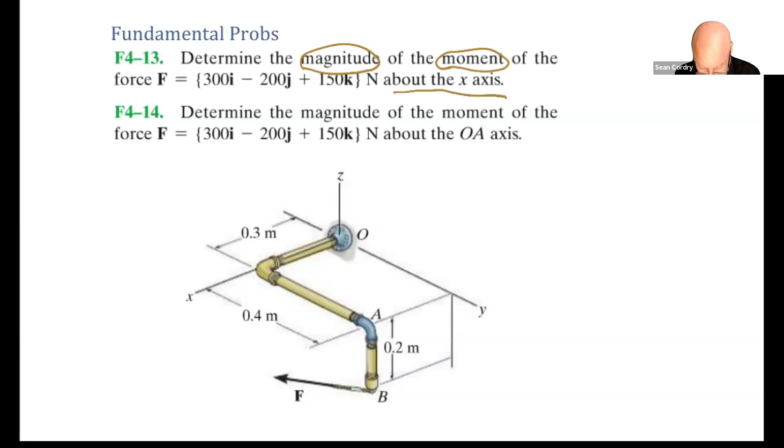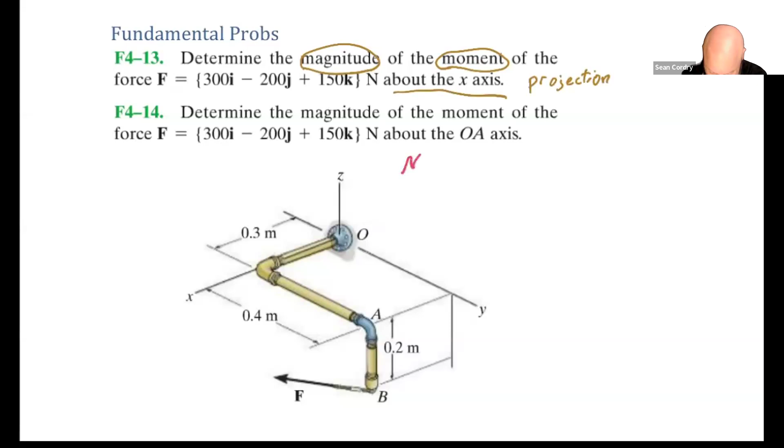Okay, so this is kind of like a projection. So what we're going to end up doing is we're going to end up finding the moment, and then we're going to project that onto the x-axis. All right, so that's the plan. Now, what that's going to give us is it's going to tell us something about how much our little force down there is trying to twist the pipe structure with regard to the x-axis.

Okay. So if you take a look at O there, and I hope this shows up good in your picture, but it's like a pipe fitting. It's like the pipe is screwed into the wall. Okay. So here's what I want you to do. I want you to talk this over with your neighbor. The force right there where it is, is that going to cause those threads at O to stay tight? Or over time, is it going the other way where it's going to kind of loosen them? Okay. So talk that over with your neighbor. Let's kind of share some ideas. All right.

Wait, can you say that again about the threads? Yeah. So the pipe is like, there's a mount on the wall there where the pipe is threaded into that mount. Oh, so you're just wanting us to figure out if it's going to tighten up as that force is applied or it's going to loosen? Correct. Yeah, exactly. Okay.

All right. Well, let's see here. Who's got an idea? Yeah, I think it's going to tighten up. You think it's going to tighten it up? Okay. So can we do like a little poll or something? Can you do reactions and give me a thumbs up? Okay, we'll do it for realsies. Okay, everybody thinks it's going to tighten up. So we're going to chase the math on it and find out if that's really the case or not.

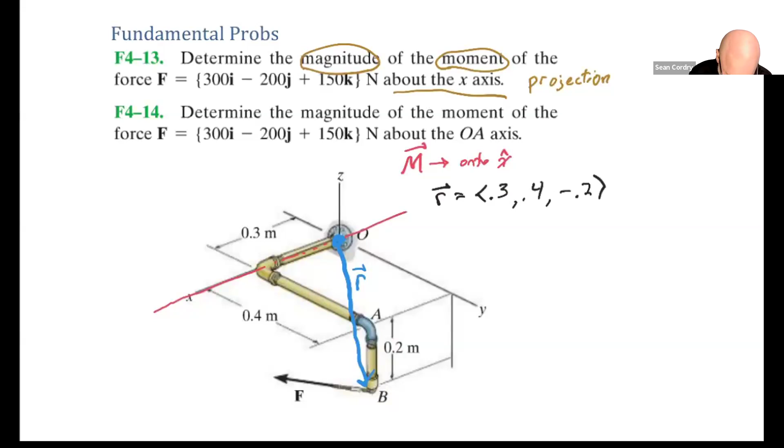So to get our moment, what we're going to need to do then is go R, cross it with F. So I'll let you work that out with your neighbor. Got it. Did you guys get it? Now I didn't say you could use Octave, but we got it pulled up, right? So we might as well. Lucas has put in there 20, negative 105, negative 180. Good. Lucas, did you use Octave or did you crank that baby out by hand? I actually used the program on my calculator I built. Sweet. Awesome. Very nice.

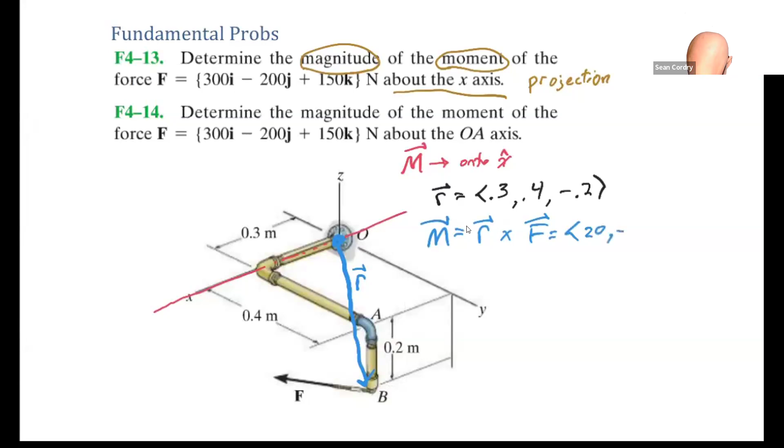Now, Mary asked a really good question. Why do we cross and not dot? Well, by definition, the moment is a cross product. The moment is a cross product. So that's why we want to do that. Now, what we did before was we used the scalar definition, which is to say that M is rF sine theta. And that's when we had to mess around with clockwise, counterclockwise, positive, negative. We don't need to mess around with that stuff here. We just put it in our cross product, pop that baby right out.

Now that's just the moment though, right? That's just the moment. But we need the moment about the x axis. So if I think about that moment that we've got right here, there is an x component, a y component, and a z component. And it's not very much x. It's mostly negative y and negative z. So I'm not even going to try to draw it on there, because it's just gonna get messy and I don't think it'll help, to be real honest.

Okay. Oh, Gerardo saying loosen. Okay. Anybody else like that? Loosen? Want to switch? Oh, Gerardo, they're leaving you hanging, man.

Can you tell me why did you decide to change and go with loosen? Because I saw that it's a positive moment, which makes it counterclockwise movement, which would be loosen. Very good. That's correct. That's correct.

All right. So if you do this thing with your hand, right? Okay. So if I have a rotation like this, then my thumb is going to be the vector that describes that direction. Okay, like this. And in our case, we know it's along X. So that means since I know this direction, I know this is going to be the rotational effort. So this is my moment right here. And that's going to try to loosen this thing. Okay.

Now, what's deceptive here, and the reason our instinct right out of the gate said that it would tighten, is just because of looking at the drawing. Now, if you look at the drawing, though, the things that matter for the X direction are this component and this component. So in terms of rotating around X, that Y component has a very small moment arm. It's a very small moment arm that's going to try and make that thing rotate around X. So we're not going to get much moment out of that thing.

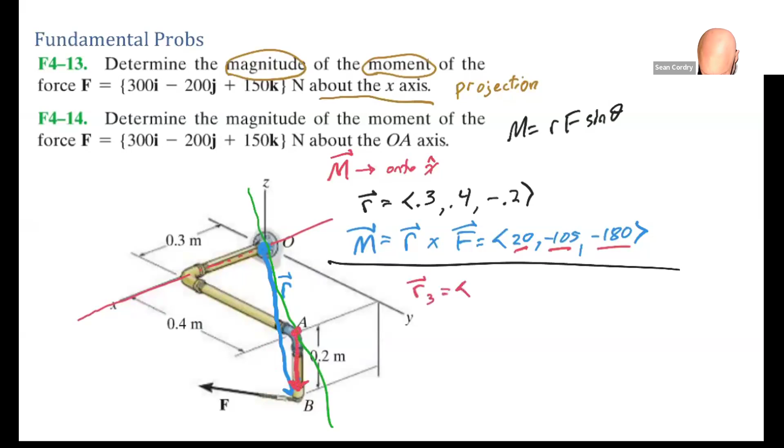Now let me clear out some of this stuff because my drawing has gotten pretty messy. Okay. So what we learn is I just need to go from the axis of interest down. So why not start at A because that's on the axis, right? And let's just come down like this to my point of application. So I'm going to call that R3. It's not going anywhere in X or Y. It's just going straight down.

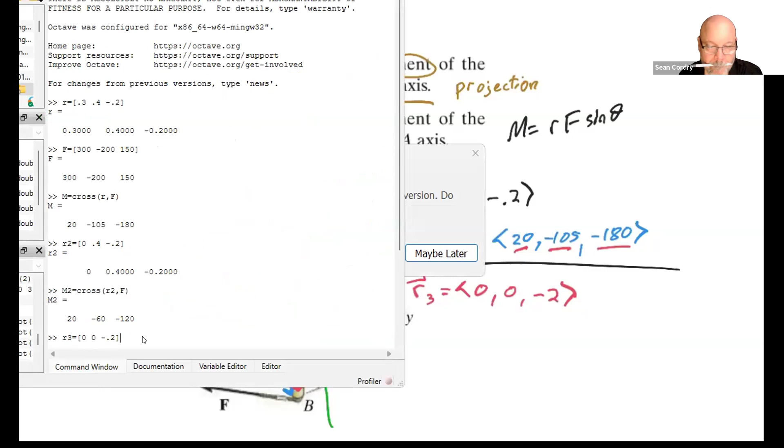Okay. Now I'm going to do the same thing. I got the same force. So I'm going to pull back up to my Octave here. I'm going to put a new R value in here. So I'm going to have R3, and that's going to be 0, 0, minus 0.2. Okay, there we go. And I need the moment, so I call it M3. Same force.

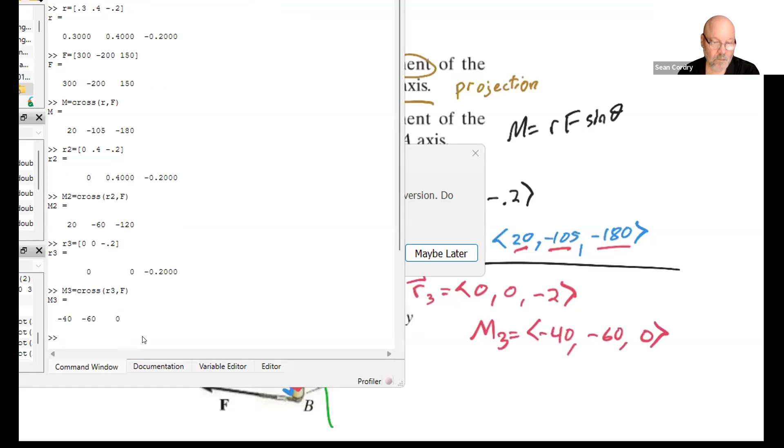R3. Oh. Boom. There we go. Okay, so what we find then is our moment. Let me call it M3. Over here becomes minus 40, minus 60, 0. Okay. Now, thing is, we want it about the OA axis. So kind of like before. Previously, all we had to do is go, oh, there it is. Woohoo.

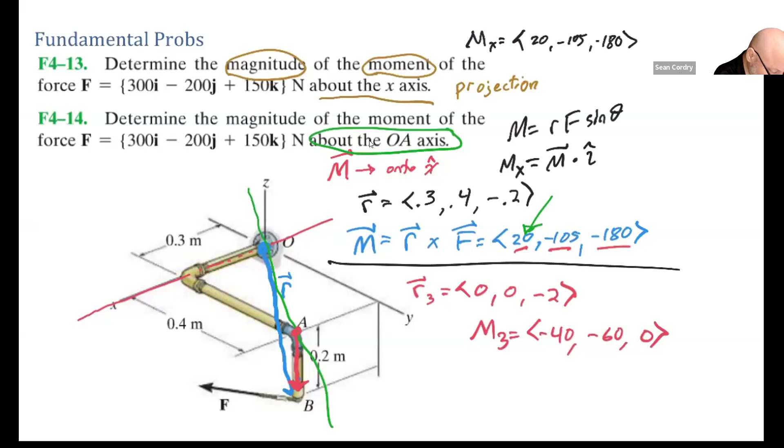But what we could have done is we could have used the dot product to find that component. So we could have gone Mx is M vector dotted with I unit vector. So what that looks like then, sorry, it's getting a little messy here. I'm going to do it up here. I've got my 20, minus 105, minus 180. And I'm going to dot that with 1, 0, 0. And hopefully you can see what's going to happen is I'm going to multiply 1 by 20, which is going to get me back a 20. That's a 0, that's not going to do anything. And that's a 0, so that's not going to do anything. So I'm just left with the 20.

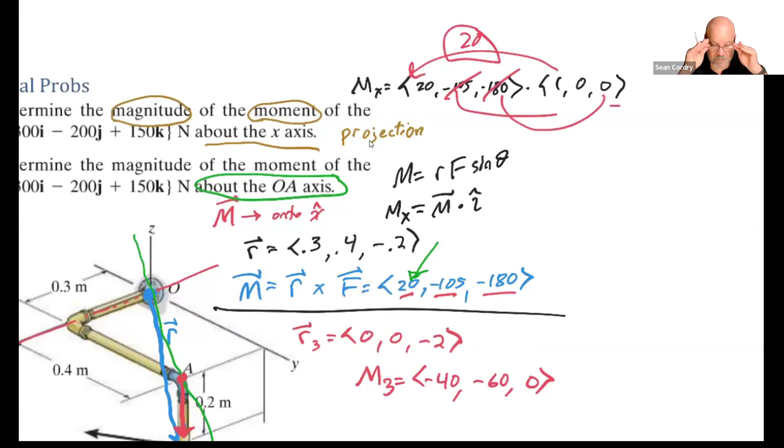Okay. So what we want to have is M about OA. So I'm going to call it M3OA. And so what we're going to do then is we're going to take M3 and we need to dot it with a unit vector along OA. And it's going to do the same thing for us. It's just going to pull that out. And that's going to tell us how much of our moment is actually along OA.

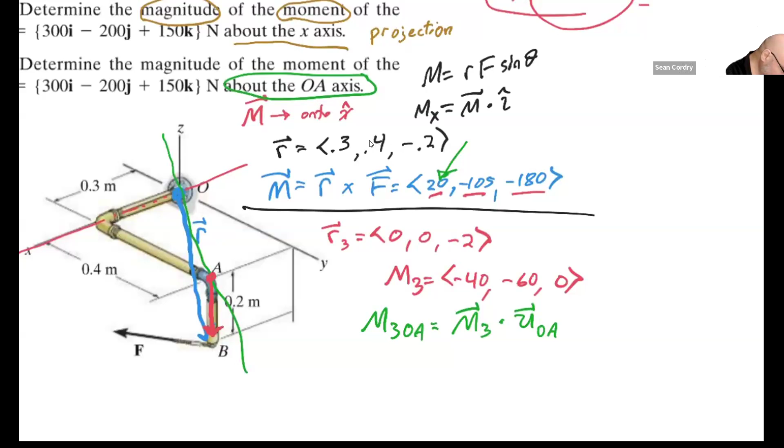All right. So with your neighbor, I want you to figure out what's OA and what's the unit vector in the direction of OA. So two things for you. Find OA and then find the unit vector that corresponds to that. Okay. Did you get it? Once you've got it, go ahead and do the dot product.

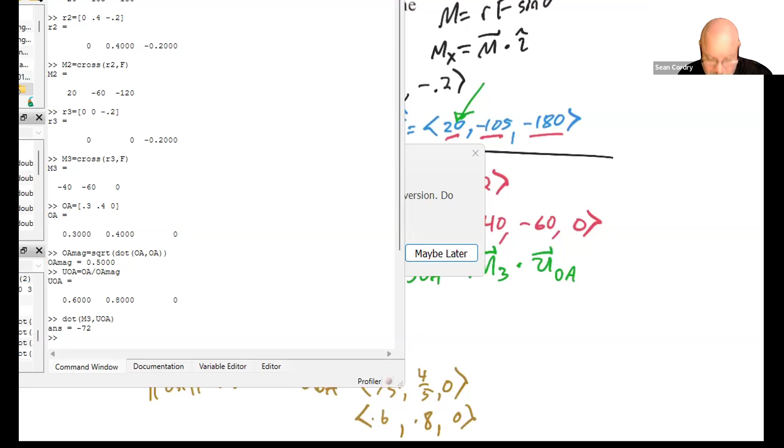Okay, so in the chat, give me some digits. How are you doing? 1 to 5. All right, that's pretty good. We're gonna do some more of these, and I think it's gonna bring it home for you because they're not really any different. Once you got your head around this, it's kind of like, same song, second verse.

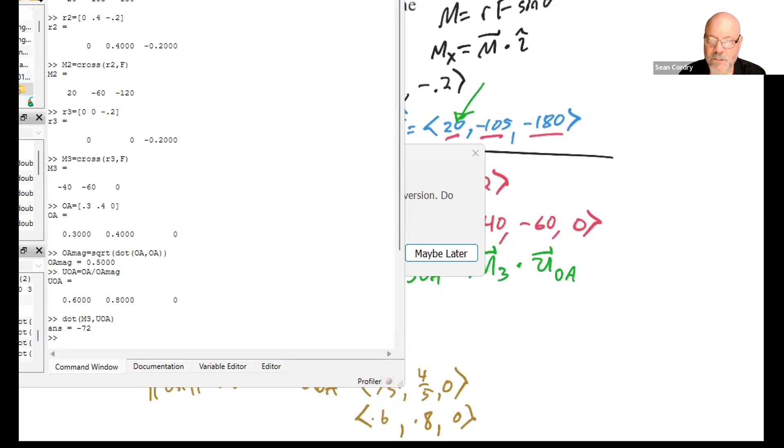Keeping up with the Octave stuff is a little hard. Yeah, I know. Especially since you can't see it very well. But here's what we're gonna do though, Gerardo. So everybody go ahead and go to your Octave. And we're going to come over here to this tab called Editor. And I've zoomed mine in, hopefully to make it a little easier for you to see.

So you're going to have a bunch of these problems to do. You know that in your heart, right? And you're thrilled, I'm sure. So how can we use Octave to make our life a little bit easier? Well, we can write a script to do these calculations, something that we can modify really easily. So the first thing we're going to do is a save as. Save as right here.

And then we got to find a place to put it. So on your computer, you figure out where you're going to keep track of that. You can see here I've got lots of embedded folders. I got to go all the way down. And we need to give it a name so that later on when we look at it, we're going to know what it is. So let's call this moment_about_axis_1, because we might need multiple copies.

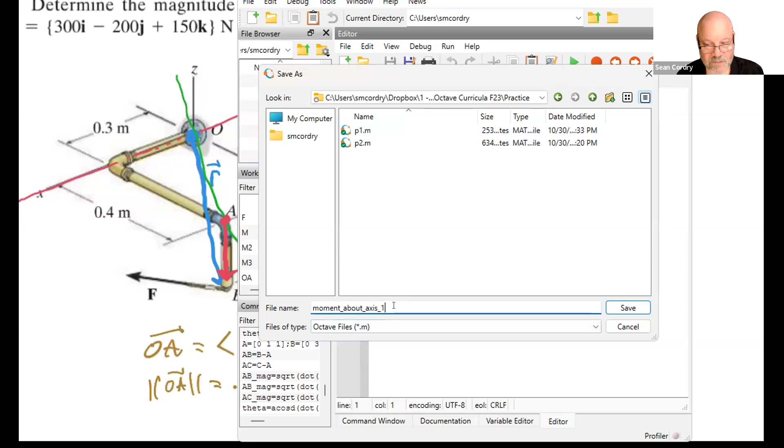Now, Octave is a little old school, so it doesn't like to have spaces in the names of the programs. That's why we got to do the underscore stuff. Then I'm going to hit save. You hit the save as button and made a file name for it, correct? I did. Yeah. And then you're going to have to figure out where you want to put it on your computer, Lucas.

All right. Now, this is going to be really simple, but it's a good time to get into the habit of doing some things. The first habit we want to develop is reminding our future selves of what we've done. Because you're going to have some project, you work on it, you come back a week later and you're going to be like, what was I doing? So learn to be kind to your future self.

So we're going to say here that this is a program or script, it doesn't matter, to determine the magnitude of a moment. I'm running out of space there on mine. You can do all this on one line on yours if you want to. I'm just going to hit enter. Of a moment about a specified axis.

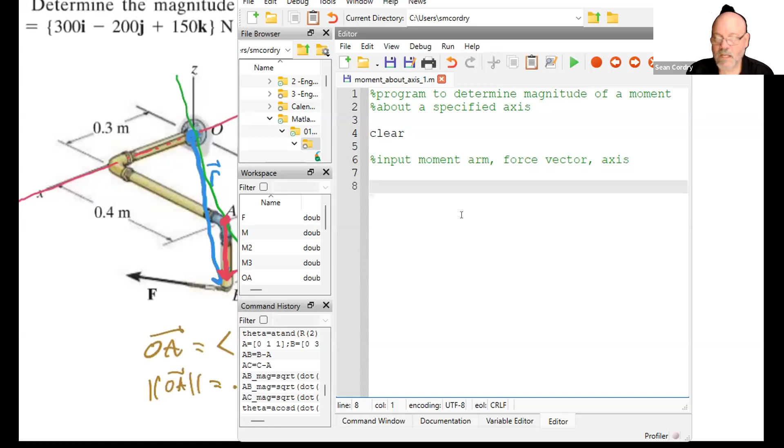So what we're going to do next is we're going to say input the moment arm, force vector, and the axis. So let's go back to the very first one we did. The moment arm is 0.3, 0.4, minus 0.2.

How are you getting your stuff to be green? Is yours not green? No. Did you put the little percent thing there? No, I put something else. Ah, there you go. So this is the editor, okay? And when you put the percent, it's just a comment. It doesn't mean anything for the program. It's just for us. And this editor is designed so that when you put a comment in, it turns green, so it's easier to see what it is.

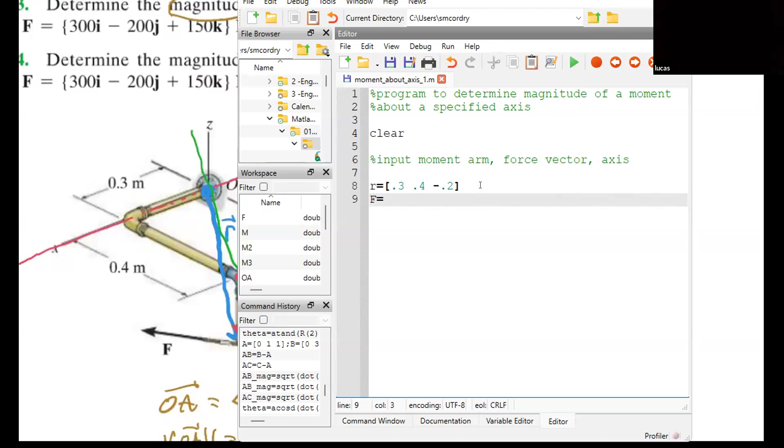So there's R. And now we need the force vector, so F, and that is 300, minus 200, 150. Whoops. You see how mine turned red like that? It's because I forgot to put the first bracket on there. There we go. And then it was the x-axis. So I'm going to say AX is the axis of interest. And we're going to go 1, 0, 0. Like that.

Now we haven't done anything yet except put in some information. But I'm going to go ahead and save it. So click save. And then I'm going to hit this green triangle over here, and that's going to run my program. So I'm going to hit it. And it gives me a message here. You probably got one like that too. And I'm just going to say add directory to load path. Boom. Just like that.

Now, it doesn't look like anything happened because things only happen back here in the command window. So starting from here, you can see it says moment about axis 1. So this is the name of our program. This is the first vector we put in. Here's the force vector, and here's our axis. So it's going to put those things in there.

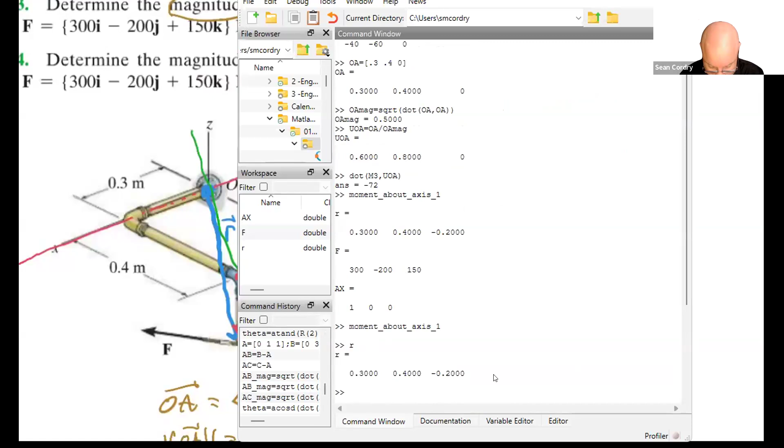So once I've done that and I run it again, I come back to my command window and it looks completely blank. So this is my second time running it, moment about axis 1, and it didn't output anything. And we might feel like, oh no, but watch this. If I go R, there it is. F, there it is. So it's in there. It's just not showing it to us.

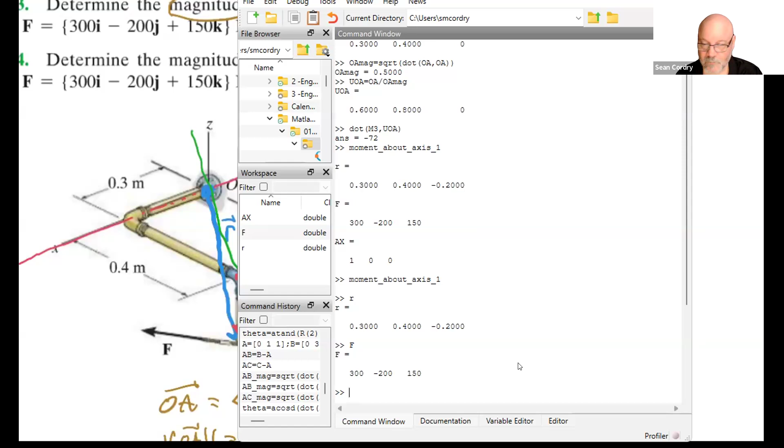So let's come back to the editor. We've got all that done. Yay. So let's find our moment. Our moment is going to be the cross product of R and F.

And then what I'm going to do is, first time out, I'm going to let it show it to us. But I'm going to hit tab. I'm going to go percent, calculate the moment. So I used the percent. I just put a comment on there. So this isn't going to do anything. It's just a note to me. I'm going to run it again. Come back to the command window. And there's M, just like we had before.

Okay. So come back over here. Now, again, we don't really need to see that. So I'm going to put a semicolon on there, and that's going to take care of that. So it won't show us now. But now we need to find the amount of that. I don't know, maybe it's useful to see. I'm going to renege on that. Now we need to find the amount of that in the direction of the axis of interest.

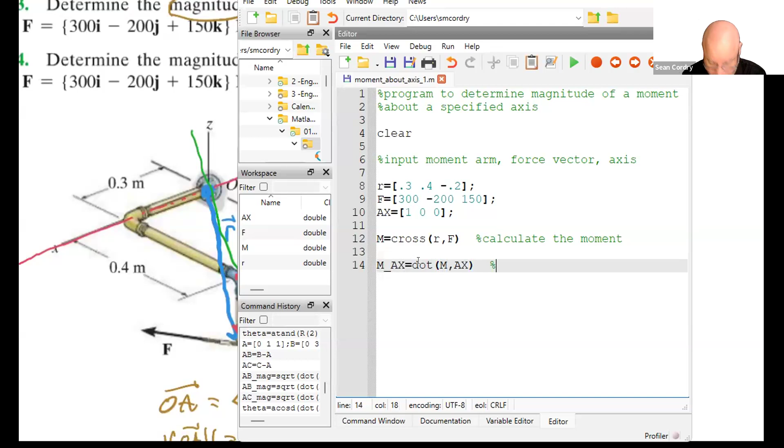So we're going to call it M underscore AX. So you can put an underscore in a variable name. It's no problem. And all we're going to do now is take the dot product of M and AX. I'm going to hit tab, make myself another note. Accumulate. This is like a projection.

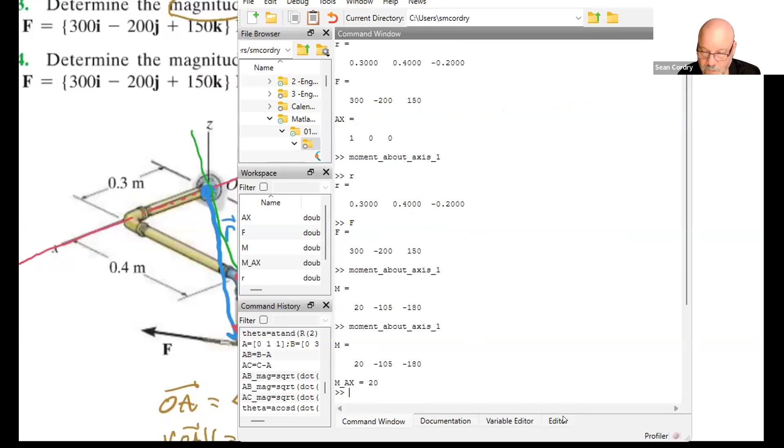Okay. I'm going to save it. Haven't done that in a little bit. Hit my triangle. Come back to the command window. Ah, there we go. Boink, boink. Picked out the 20. Piece of cake. All right. Let me pause here and make sure everybody's feeling pretty good about what we got so far.

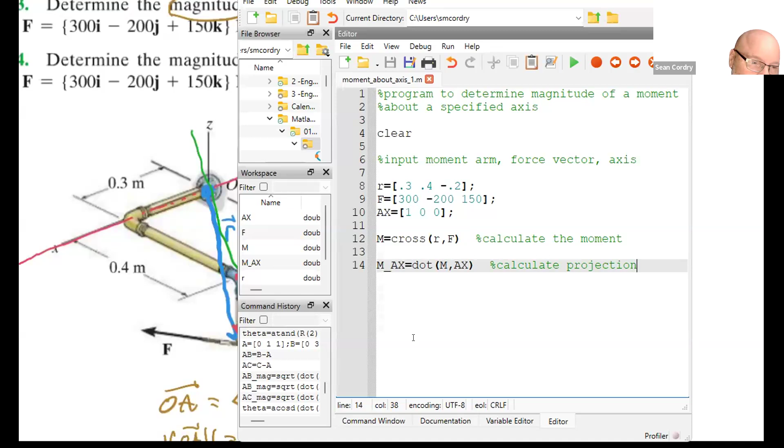So, oh, Mary's got an error. Parse error near line 6. Add directory to load path. What? Nothing. Never mind. Did you get it fixed, Mary? I forgot the equal sign. Oops. That would do it.

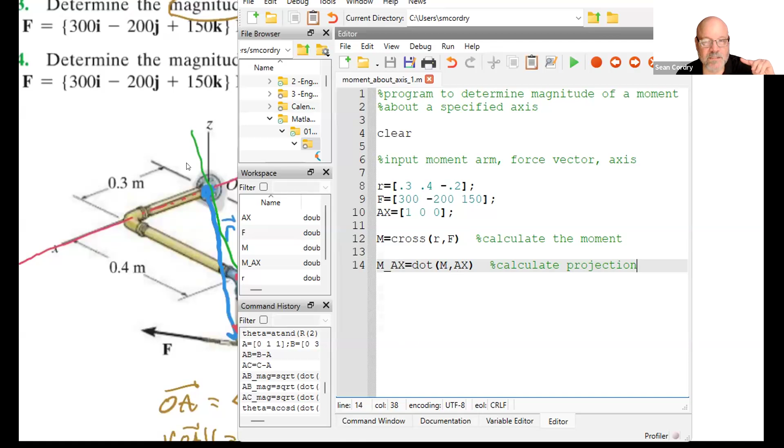Okay. So now what we're going to do is, if you remember, when we went to the second one here, we were about the OA axis, not just the X axis. And we had to go through this stuff down here where we defined the axis, then we had to turn it into a unit vector, right? So we really need to do that. Where did my thing go? There it is. So we're going to come up here and I'm going to say UAX. Now, right now, UAX doesn't exist. It's going to be the unit vector for AX.

But before we do that, we already got 1, 2, 3, 4, 5 variables. So let's leave some breadcrumbs for ourselves. So R is the moment arm. F is the force vector. And I'm going to make it look a little nicer. And AX is the axis of interest, like so.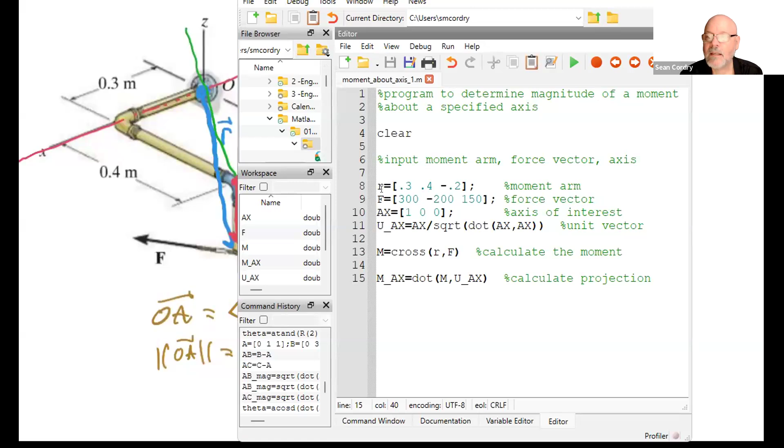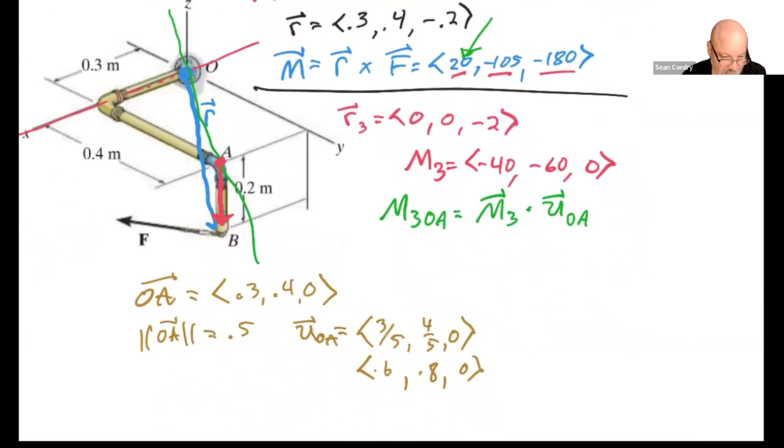So let's do the last one that we did. Okay. So we got to put the OA in there. So OA is 0.3, 0.40. So I want to do that. Okay. So I'm going to come up here. So all I have to do now is put 0.3, 0.40. Okay. And run it.

Boom. And come back to the command window. And there we go. Minus 72, which is what we had before. Okay. Yeah, no problem, Gerardo. There's a lot of little subtle things. Lots of ways it can go wrong.

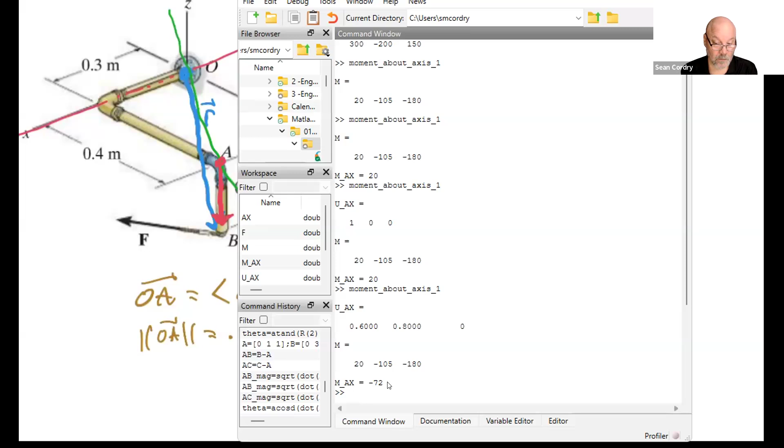Okay. So let me put the editor back up here. Okay. And again, I want, what point did you use for that OA, Mary? I used the exact vector that we used before.

Okay. So how are we feeling with the Octave part of this? Give me a number. Give me a number. Okay. Good. Tyler's got 5. 4, 5. Okay. Good. All right. Awesome. Okay. We can live with that.

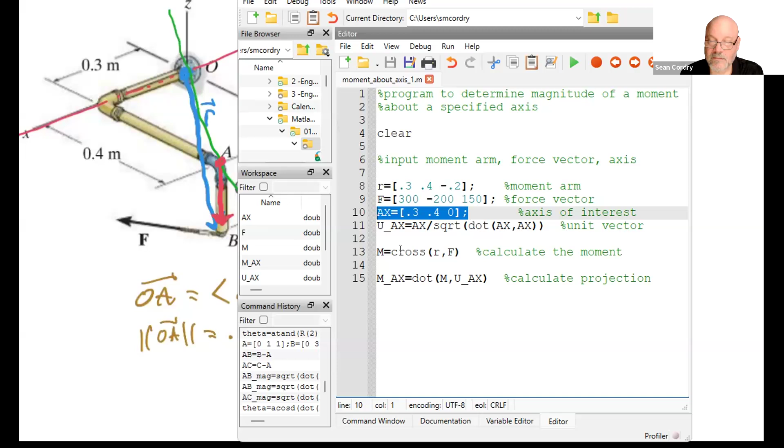So here's what we're going to do. So we've got this fancy little program here. I want you to use our fancy little program to solve this one. Okay. So you can work with your neighbor. It gives us direction cosines there. So you may have to modify, unless you want to figure out the force vector by hand, but you can modify our program a little bit to do that for you. But go ahead and work that out.

It says solve the problem using both a scalar and a vector analysis. Don't do the scalar thing. We're not even going to bother with that. I haven't even showed you that. So we'll just go straight to vector analysis. Okay. All right. So set it up and figure out how to use our shiny new Octave program to crank this dude out.

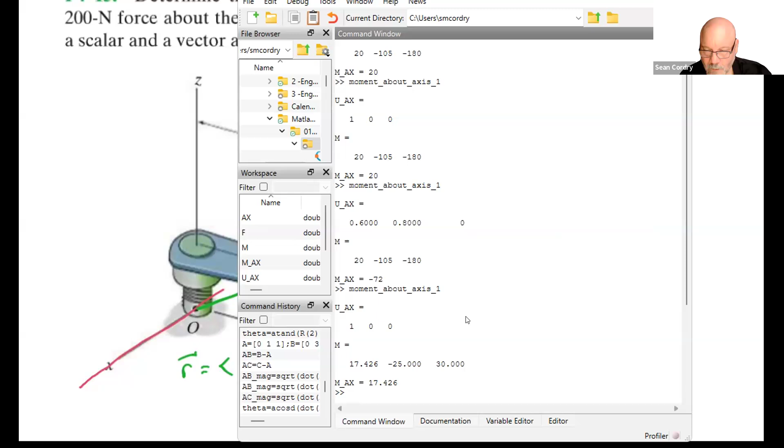Gerardo got 26.9. Uh-oh. Did I make an error in here? So R is 0, 0.3, 0.25. Okay, so this looks correct. And I got 200 on the cosine 120, cosine 60, cosine 45. Square root, dot, cross product, cross product.

Okay. Anybody else messed up? I just messed up with the F. Sorry, what? I just messed up with the F part. Oh, this part here? Okay. Okay. You're getting creative.

Okay. Let's see what else we got, guys. Well, let me say this now. How are we feeling overall with this stuff now? We had a lot of 3s and 4s earlier. I want to see how everybody's doing. Four and a half. There's one in every crowd. Okay, okay, okay. Let's look at another one.

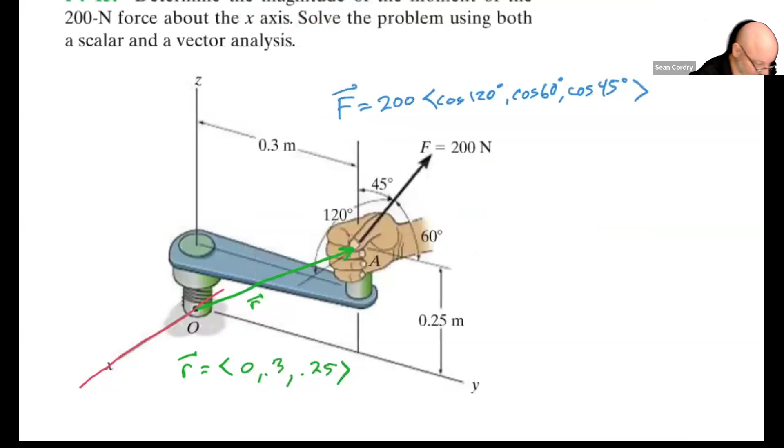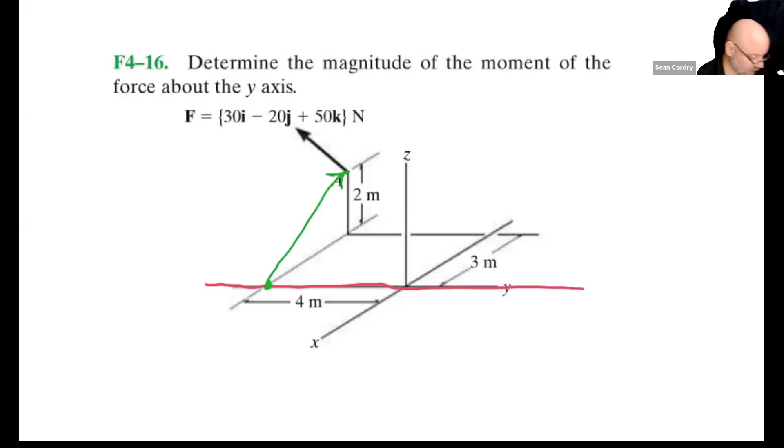Okay. Everybody tried this one. And we're interested in the y-axis. Okay, so here we go. So when we do our moment arm, we need to go from there up to that point. So anywhere on that axis, this is the easiest place right here, just to come straight up like that. So there's our R. All right. So take it from there and try to give you a little bit of a head start.

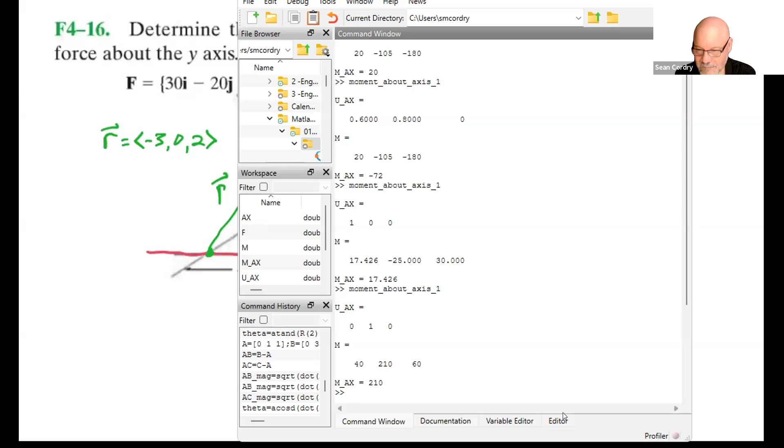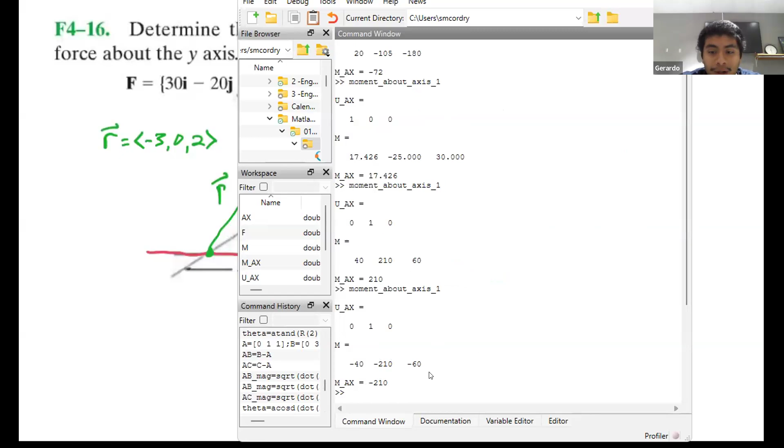So here's R. So if you put the R in backwards, then you'll get a negative 210 for sure. Why'd you put 0 for your Y? For your R? Because let me get rid of that first. Because this is the XZ plane. So it's over here at 4. It's still over here at 4. It hasn't moved in the Y direction going from here to here. Okay.

Spencer have a breakthrough? Do you have a breakthrough? We've been working hard on this for several weeks now, you know. Sometimes these things take a while to process, but hopefully you had a breakthrough. That's good. I think our brains have ascended a level. Your brain's ascended a level. Okay. Yes. Very good.

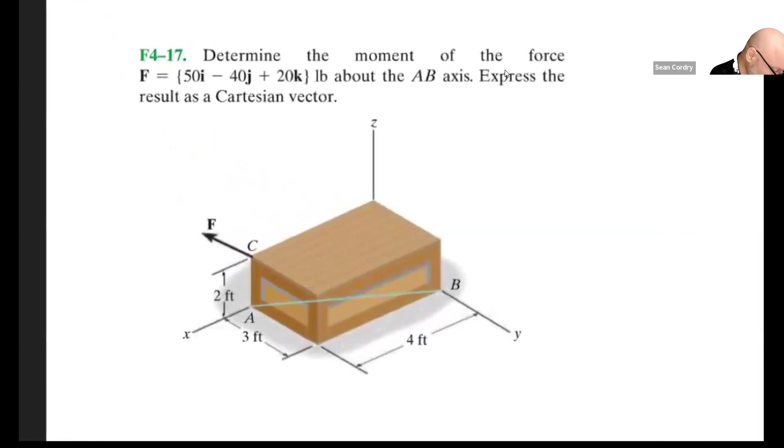Okay, I want to do at least one more, so everybody can feel a little more comfortable with how all this works. Okay, now on this one, our program is going to do more than we need it to. So we don't really need everything that's in our program, so we'll just ignore some of those things. But we want to do this just like we did the others, which is let's first figure out our axis of interest, and it is right along here.

Now what it says is determine the moment of the force about the AB axis. So that guy right there is going to be R for us. So let's go from B to A. It says AB axis, but I don't know that it matters. It might turn out to be different by a negative sign. So if you're off by a negative sign, it's just because of that. It doesn't really matter. So R is not going anywhere in X, not anywhere in Y, only in Z it's going up 2.

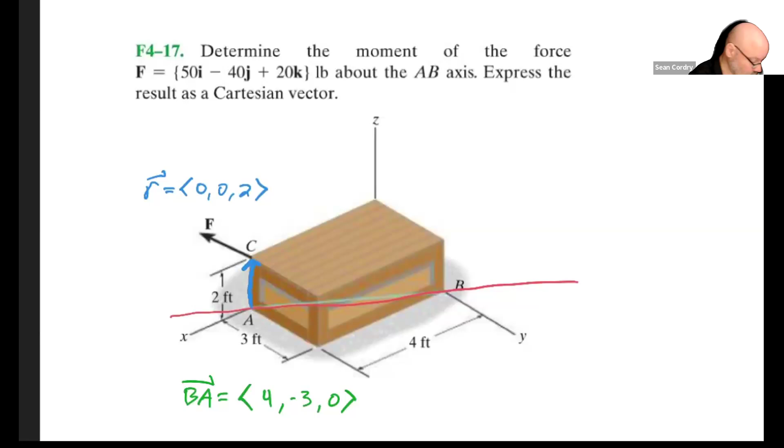Okay, so let me come over to my program. Let's make these modifications. There's that. F is 50, minus 40, 20. There we go. Now, axis of interest, we said was 4, minus 3 and 0. Okay, so that's all I had to do there. And remember, it's going to tell us what M is, and what the component of M along AB is.

Okay, so I'm going to run this baby. Come to the command window. There we go. We got 0.8, minus 0.6. Okay, 80. Okay, so we got 4. So that's all we got. Not a lot. AB magnitude is 5. Yeah. I got 4. How'd you get 4? Well, it's a 3, 4, 5 triangle.

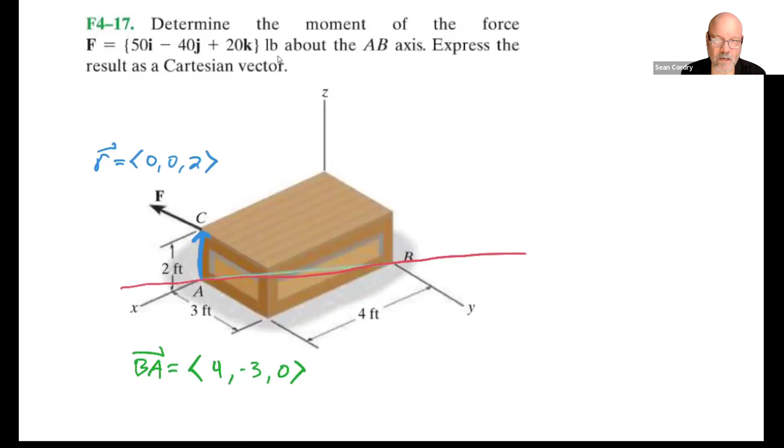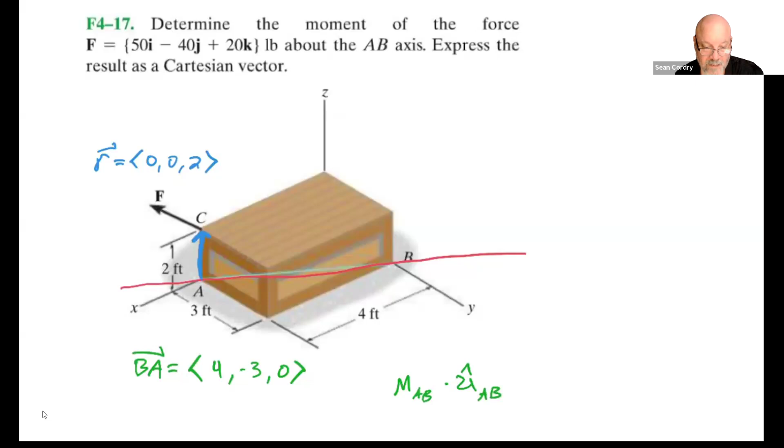Okay, great. So now here's the thing though. We haven't actually answered the question because it says express the result as a Cartesian vector. It's like, wait, what? Everything we've done so far is a scalar. Now it says the moment about AB, but it doesn't say the magnitude of it. What we've computed is the magnitude, but that's okay because all we have to do is take the magnitude of that projection and work it with the unit vector. So we got that number 4 for the answer, but that is only the length of it.

So we're just going to come back to the editor here. We've got the projection. So now we're just going to call it MAX. And that's going to be different than with the underline in it. And we're just going to take M underline AX, multiply it by our unit vector AX, like so. Now I might have to come back up here and remind ourselves that this is a magnitude. And then let's make a note for ourselves here, that this is the vector projection. Like so. Wait. There we go.